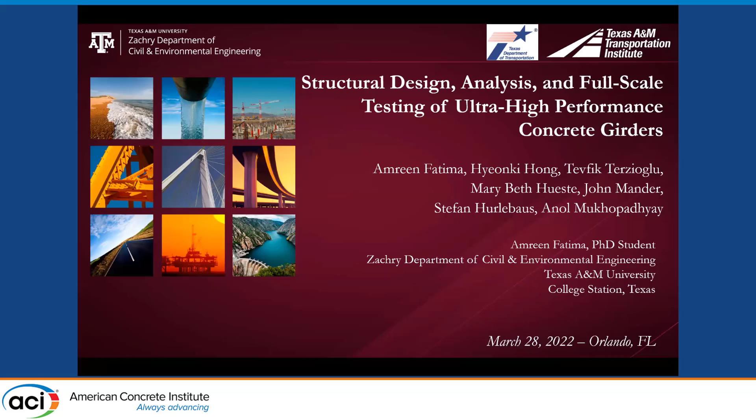This research would not have been possible without the contribution of the following people. This is a TxDOT-funded project led by Dr. Hueste. We were mainly interested in identifying the potential utilization of ultra-high performance concrete in standard Texas highway bridge girders. What you see here are the finished cast-in-place deck slab and the UHPC girders, Specimen 1 and Specimen 2, in the field.

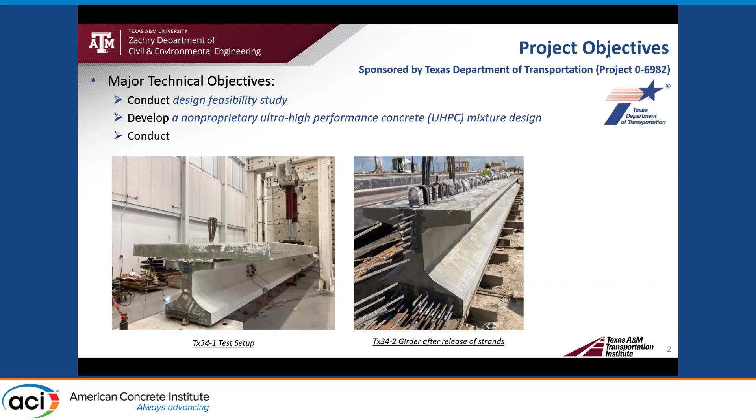First, we had to conduct a design feasibility study to identify target properties that would best optimize UHPC design for bridge girders when compared to conventional concrete girders. Having identified those properties, we had to achieve those by developing a non-proprietary UHPC mix, and then conduct material level and full-scale tests on specimens developed from that mix.

Ultra-high performance concrete has several benefits, such as high compressive strength, high tensile strength, coupled with superior durability. This gives the advantages of getting longer spans, fewer girder lines due to higher prestressing force, and the long-term benefit of longer service life. This justifies the high initial cost of UHPC.

Frequent maintenance and inspection of bridge girders in Texas costs TxDOT a lot of money. Therefore, having a longer service life would really help with the better life of these structures and reduction in maintenance and inspections.

We developed a non-proprietary UHPC from locally sourced materials in Texas. This effort was led by my project mate, Hyeonki Hong. Since commercial UHPC is very expensive, it was necessary to develop a locally sourced material mix design so that the cost can be cut down.

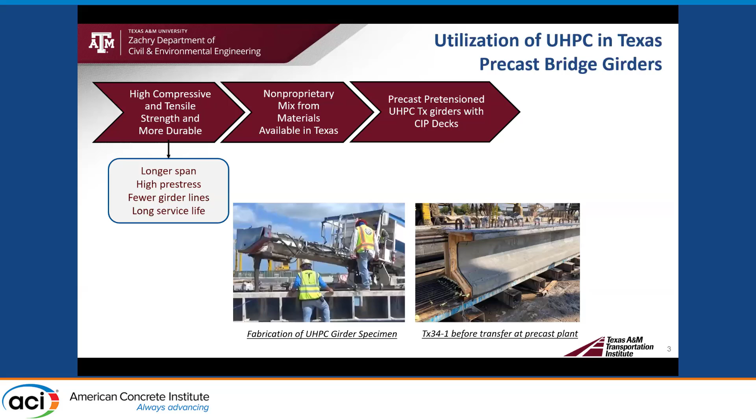We tested that developed mix in the precast plant. Once we were happy with the trial batch, we then fabricated UHPC girders at a full-scale level, and we had a cast-in-place deck slab poured on top of it in the laboratory. We then tested the performance of these specimens in the lab under flexure and shear.

To give an overview of the mix developed at Texas A&M University, we got high early strengths of 12 KSI at release, and about 18 to 19 KSI at a later stage. A modulus of elasticity of about 6,500 KSI and a tensile strength of 0.625 KSI.

I would like to point out that we were using 1.5% fibers by volume when compared to the usual 2%. This also reduced the cost. We got a high flexural tensile strength of about 2 KSI.

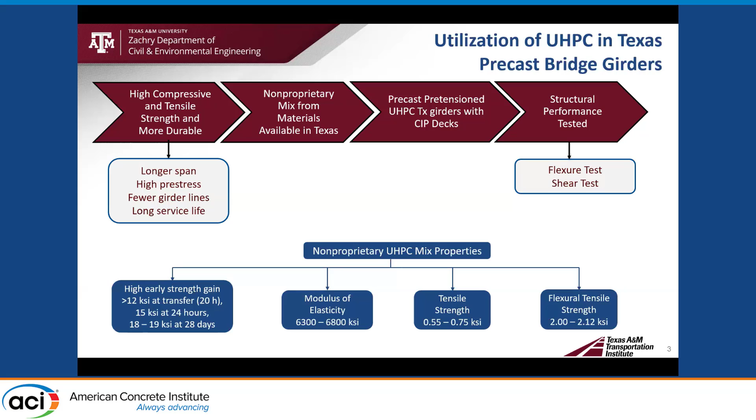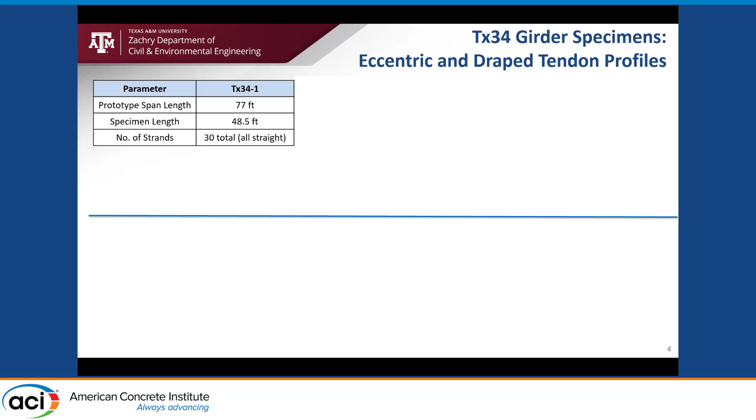We cast two 50-footer long full-scale specimens. The first one was with 30 strands, which were all straight, and we got a prototype design of 77 feet span length with this one. The second one was with 38 strands, and we had 6 strands harped. This specimen had a prototype length of 85 feet.

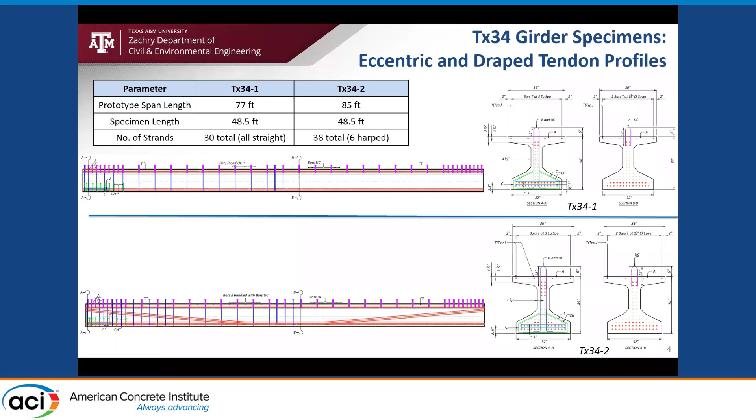One thing we were interested in identifying was the shear performance of UHPC because of the steel fibers. The steel fibers drive the cost of the mix by about 50%, and therefore we were interested in identifying the potential of reducing the transverse web reinforcement in these girders due to the higher shear performance of UHPC.

What we did was have one half of the girders with minimum transverse reinforcement by design, and the other half was without any transverse reinforcement.

Since we had a conventional concrete deck slab on the top, and we wanted to maintain composite action at the interface of UHPC and the CC deck, we provided shorter U composite bars at the interface. We provided bars of number 5, which were just a shorter version of the standard R bars, number 4, used in Texas.

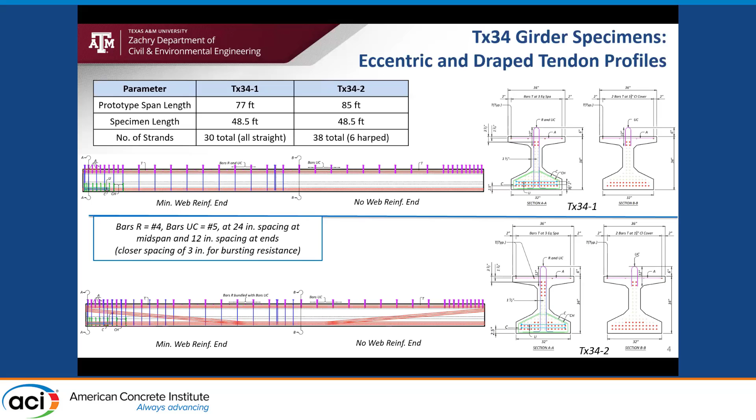The first specimen was tested and we got a pretty good capacity of 5,400 kip-feet in flexure. The first specimen was designed for a lab tensile strength of 0.7 KSI. However, for the companion field specimen, we found out that the tensile strength was 0.55 KSI.

Therefore, we were anticipating shear crack prior to flexure failure, and that is what we got at the no web reinforced end. In order to preserve the beam for flexure, we decided to unload one actuator nearer to the no web reinforced end and went ahead and loaded the other end until we got flexure failure. You can see the cracks, and the failure occurred under the loaded actuator.

All the predictions were very close to the experimental values.

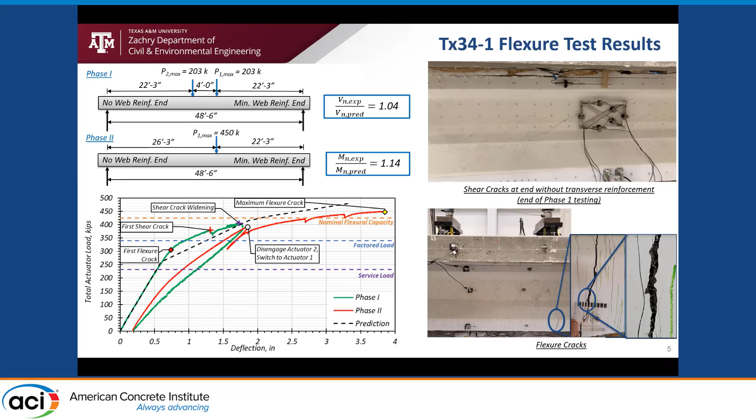The second specimen had better tensile strength of 0.625 KSI, and we had higher shear capacity due to harped tendons and more prestressing. Therefore, we did not run into any issue of premature shear crack with this specimen.

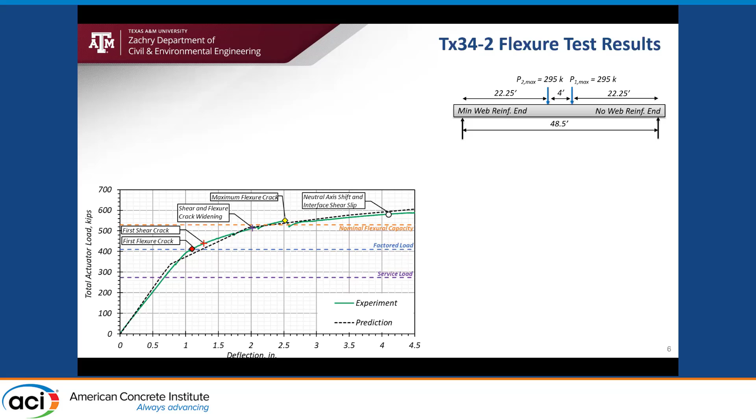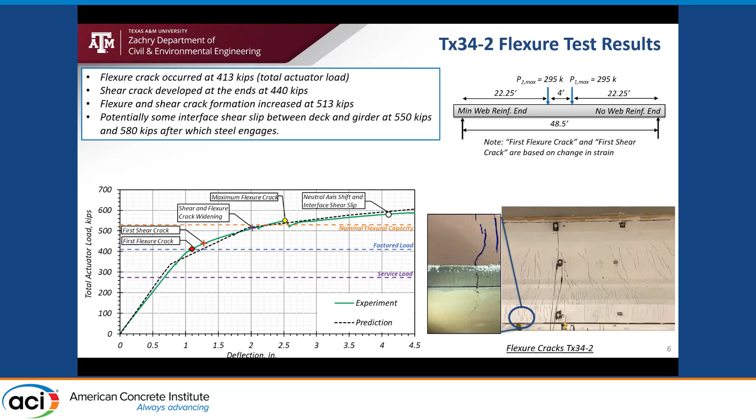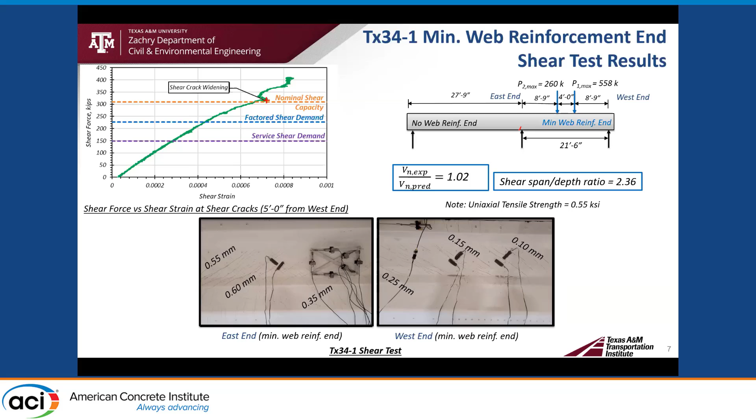Then we wanted to check the shear capacity of the minimum web reinforced end of the first specimen, and we conducted shear tests with a span by depth ratio of 2.36 for all, and higher than 2 for almost all of the shear tests. You can see the shear cracks that were developed at that shorter span that we tested, and we had narrow cracks at the west end, and then we had wider cracking at the east end because this end was already more damaged due to the previous flexure test.

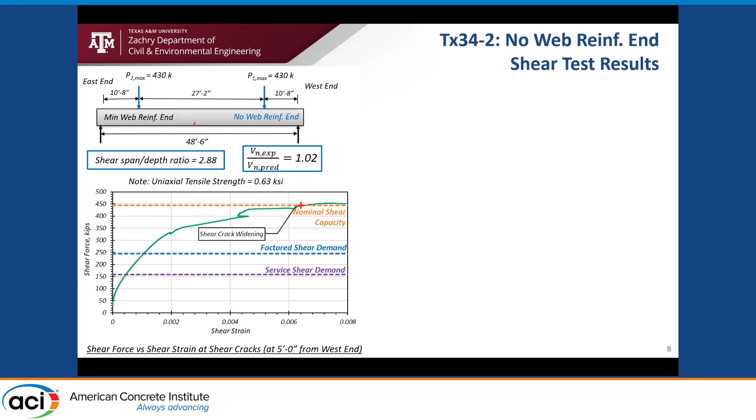The next specimen, as I mentioned before, was stronger in tension and had better shear performance with about 444 kips shear strength. We did not run into any issues of premature shear cracking, and therefore, after the flexure test was done, we tested the whole beam under shear, and sure enough, the end with no web reinforcement failed first under shear, and we observed typical web shear cracks in this region. Along with that, we had interface slip at the bottom flange, and a prestressing strand was exposed.

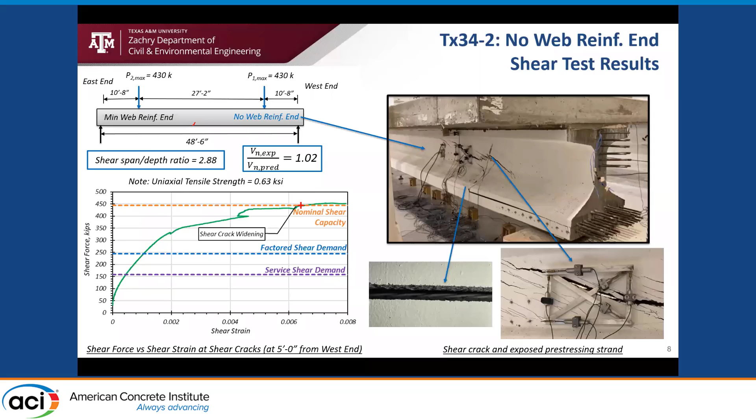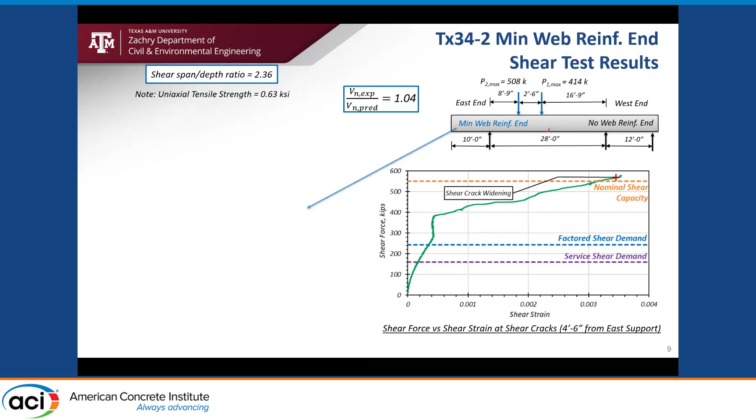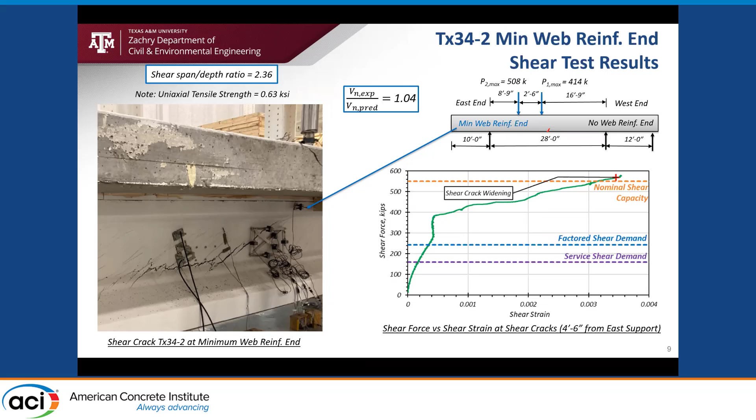Then we wanted to test the minimum web reinforced end of that specimen. So we again tested the shorter span, and we got similar web shear cracking for this specimen as well. We had a pretty high shear capacity of about 550 kips, which was pretty close to the predicted values.

For the second specimen with higher tensile strength, more prestressing and harped tendons, we have more contribution to shear, and that is easily reflected from the better shear performance of both ends when compared to the factored demands.

The cracking was also very limited, and under service condition, we got no cracks. Beyond the factored demands, we observed slight hairline cracking. At failure, we only had major cracks at the crack localization areas with a 4.5 mm crack and 3 mm crack for the two girders respectively at the soffit where the crack occurred.

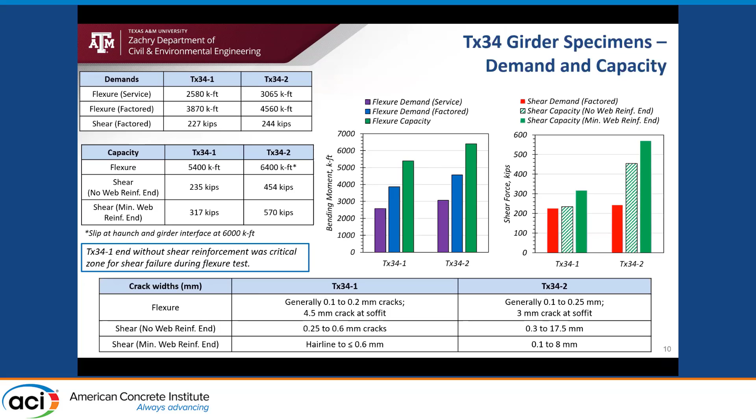For the no web reinforced end, we observed wider cracks under shear with more crack opening near failure. For the minimum web reinforced end, we had quite narrow cracks until the major crack opening.

From the experiments conducted, the following conclusions can be drawn. The girders can be designed for UHPC using the standard code provisions with slight modifications for UHPC. The first principles of mechanics hold good for identifying the behavior of UHPC girders with conventional concrete deck slabs. Using standard constitutive relationships, stress strain models, and sectional analysis gave us good agreement with the predicted results and the experimental results.

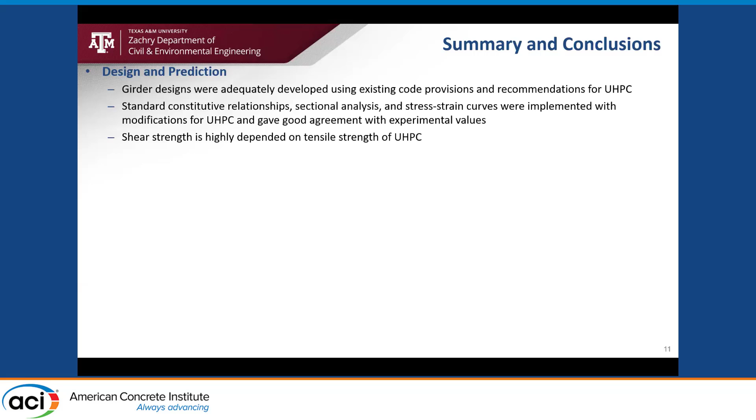It was seen that the shear strength is highly dependent on the tensile strength of UHPC from the experimental results. The flexure performance was kind of governed by the composite action with the conventional concrete deck slab on top and the UHPC girder being mainly engaged in tensile strength at the bottom. The crack bridging properties of the fibers was very effective in getting ductile behavior.

The cracking showed that the performance of the girders under service conditions was really good with no cracking and mainly hairline cracks beyond factored load.

We noticed one additional thing for the second specimen. Near the failure load, we observed an initial slip at the interface of the cast-in-place deck slab with the UHPC girder.

The shear performance of these girders also showed great potential for reducing the minimum web reinforcement in these girders, and that would in fact make the design more efficient in terms of time and money. The crack bridging properties of the fibers tend to delay the onset of shear failure.

Cracking again was not visible during service conditions, and beyond factored loading, we had more cracks being observed.

Major conclusion that we drew is that increase in tensile strength, harping of strands, and higher prestressing force tends to largely improve the shear capacity of the girders even without minimum web reinforcement. Having minimum steel in the shear region will definitely enhance the ductility of the specimens.

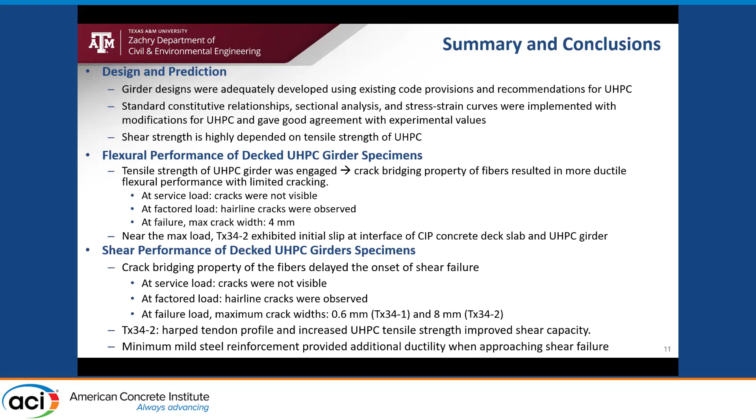Hi, excellent presentation, very concise, good information. I just have one kind of detail question.

So for the U-bars that you use to establish composite behavior, and in particularly in the area where there was no shear reinforcement, what was the length of embedment? And related to that, you mentioned something about slip. Was there a difference between the two? How much composite action did you maintain?

Okay, that is a very interesting question. Thank you. Yes, this is a very interesting topic, the interface between the UHPC with other materials, and not a lot of research has been conducted in this area. We are also looking into it more carefully.

To answer your first question, the U composite bars were about 12 inches long with an embedment length of around 6 inches within the concrete. And incidentally, we had the slip at the end with the other bars as well. It wasn't on the end that you would expect intuitively that would occur.

So it could be because there wasn't any surface preparation on this specimen, and there was on the previous specimen. So that would be the first guess, since surface preparation of UHPC is very important because of not having any coarse aggregate, so that aggregate interlock advantage is missing. That would be my guess, but we would make a solid conclusion after further processing of the data.